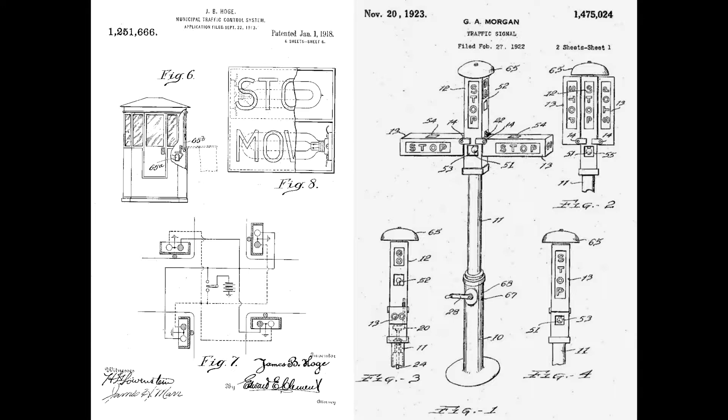So you saw variations of this electric traffic signal start to crop up all over the United States and Canada over the next decade. Among the most famous variations, many of you know about this, is Garrett Morgan's 1923 patent, and it was more reliant on semaphores and text-based directions than the electric light combination that we know and love today. However, his patent was really important because it was snatched up by General Electric. They bought it for $40,000. What that led to was increased standardization among electric traffic lights and mechanisms over the following decades.

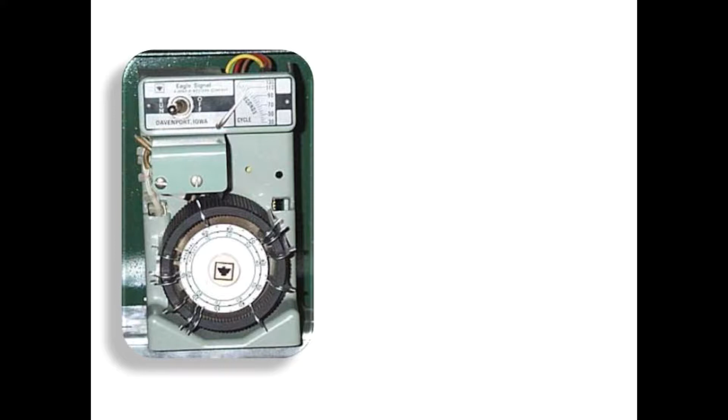So traffic signals have played this huge role in increasing intersection safety, particularly in urban areas. And while they played that role, engineers began to develop new devices to offer more nuanced control of signal timing. For safety purposes, it's unwise to waste green time on unused side streets while there's heavy demand on the main line. So the electromechanical controller looks very similar to a sprinkler system timer, Christmas light timer, those basic mechanical timers that we use in some of our household devices today.

The electromechanical controller allowed timing engineers to more easily control signal timing based on the actual traffic patterns at an intersection or along an entire arterial. By placing pins along a dial at specific intervals, signal timing could be more easily modified to better suit the general traffic pattern by time of day. Many of today's common terms, splits, dials, cycles, offsets, all come from the physical characteristics of the electromechanical controller.

Those very same characteristics were replicated in the new age of digital controllers that began in 1976 with the NEMA TS1 standard. And again, safety was a driving factor in the standardization offered by the NEMA TS1. It was basically the functionality of the electromechanical controller in a digital box, and it was designed with universality in mind, designed to spread standards across regions.

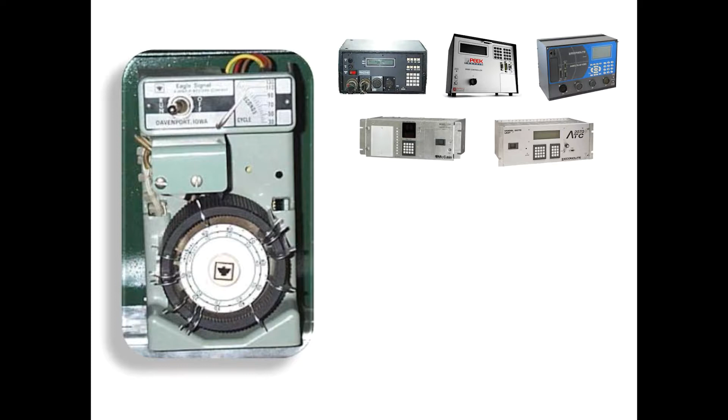This advancement was followed by the TS2, the TS2 Type 2, and the 170 and 2070 world that was pioneered by the New York State DOT and Caltrans. All of these boxes were designed for easier access, faster programming, and more granular control of options at the intersections. Those were all hallmarks of these units, and all were governed by the NEMA ring and barrier structure that was at the core of their programming.

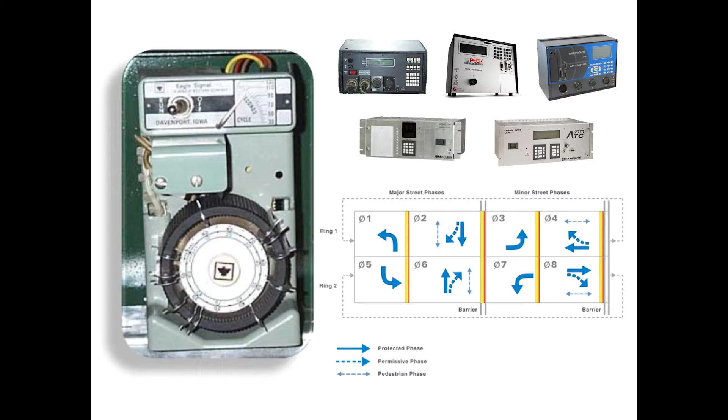So whether it was the static operation of the old electromechanical controllers or the new flexibility offered by more standardized and computerized operation, controllers improved intersection safety. It was a way to better time signals based on the actual traffic patterns observed at intersections and along arterials. So it improved safety, period. And when talented engineers applied their signal timing prowess, even the old electromechanical units could be timed to offer excellent mainline progression through a series of signalized intersections.

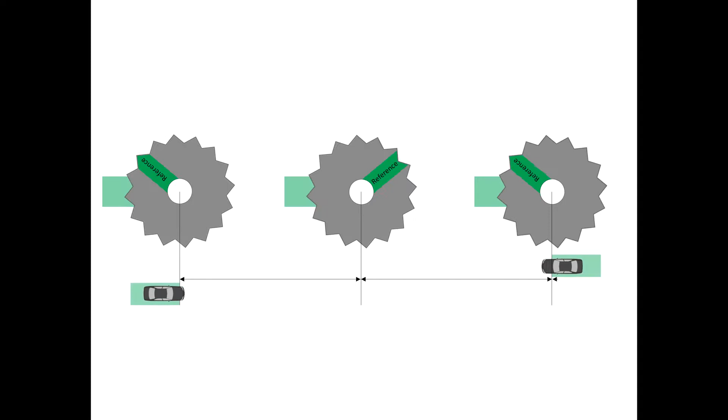So offsets were scheduled in such a way that common cycle lengths on controllers across an entire network of intersections could facilitate progression from one intersection to the next. On this diagram, you can see that the reference points match up, and our mainline directions are served in such a way that both cars, eastbound and westbound, progress through the network of 3 intersections with no stops. This analog mechanical progression forms the basis for signal timing practices even on the most modern of controllers. However, those standards are not without limitations.

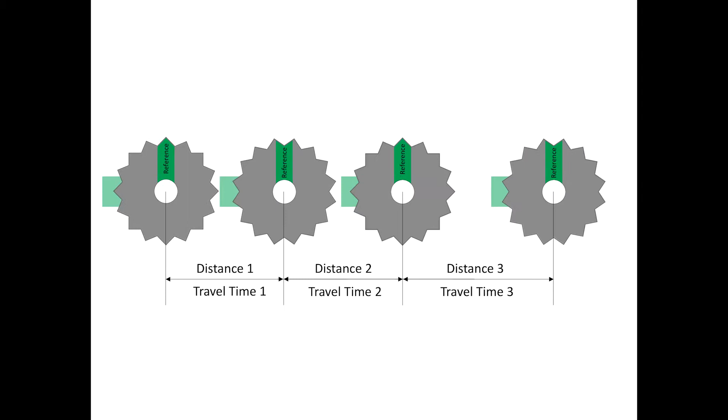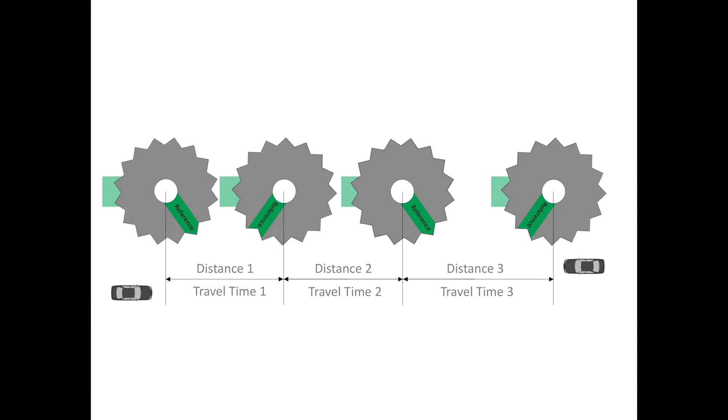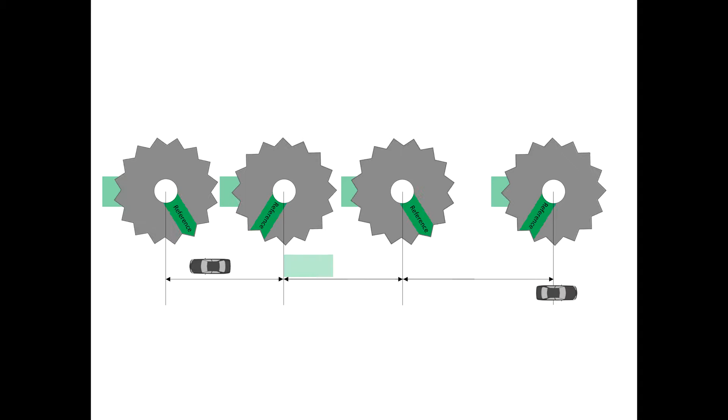So while this particular diagram worked, if we throw a 4th intersection onto the corridor, this time with a distance different than those between the first 3 intersections, bidirectional progression starts to take a hit. Our eastbound car will be able to progress through without an issue because the reference points line up really nicely for the eastbound direction. But our westbound car suffers a stop at every single intersection. That's just the limitation of the analog nature of a ring-based structure. We had to force stops along one direction in order to favor the other. So we forced stops for the westbound in order to progress towards the east.

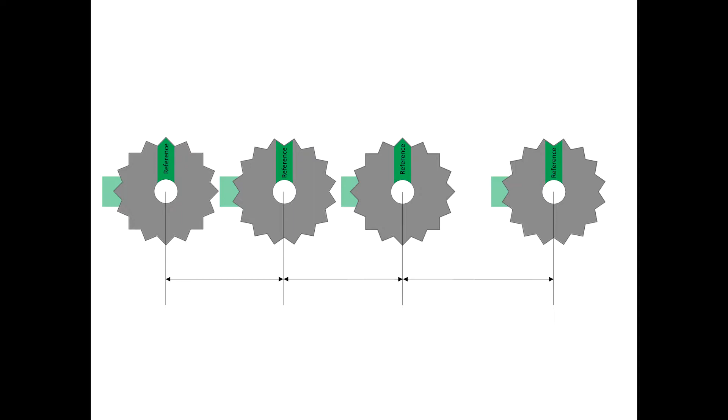And this is a sacrifice that many traffic engineers know they have to make. One direction of travel sacrificed in favor of the other. And it's a reality that our motorists deal with every day. Even the best signal timing practices can't overcome the limitations of an analog system, or even systems that emulate that analog operation. That can lead to congestion and start and stop traffic for many motorists.

A lack of coordination, of course, leads to motorist frustration. Frequent stops can actually lead to distracted driving. And even moderate improvements to signal timings have been proven to increase safety. But when we're working within the confines of an analog system, and we're forcing stops due to the limitations of that equipment and the increasingly complex math problems of bidirectional progression, we're actually inviting distracted driving and the accidents that come with start and stop traffic.

So unfortunately, the very technology that we've developed over the decades forces limitations on us that have introduced new safety hazards that really weren't even considered during the advent of electromechanical controller technology. When the first engineer designed an electromechanical signal controller, he wasn't thinking about people who were stopped at red lights playing on their smartphones. If a signal doesn't have the means to adjust to changing volumes, motorist frustration and safety hazards are just going to increase.

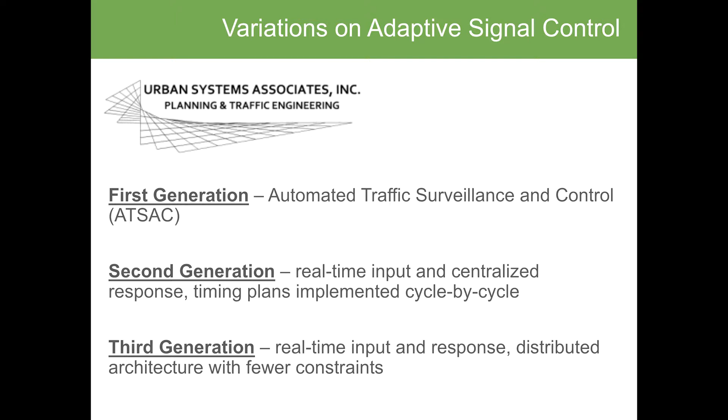We're now looking at a third generation of adaptive technology, transitioning to a distributed architecture that's going to move further away from the constraints of traditional controller technology. So we've established that traditional controller technology has its limitations. And with those limitations do come some particular safety concerns. Frustrated motorists, distracted driving, start and stop traffic. There are, of course, other benefits of automated adjustments and adaptive signal timing.

So when we base that on volume and delay, before and after studies have shown that adaptive systems can reduce overall system delay, we can achieve better progression through a network, we can reduce queuing, we can stave off the onset of congestion, and we can actually reduce fuel use and emissions. Many agencies around the country are able to apply for grant funding because all of these benefits, reduction in delay, reduction in the number of stops, improvement in progression through a corridor, also have those peripheral benefits of reducing fuel use and reducing emissions. So they can apply for grant funding that is focused on air quality.

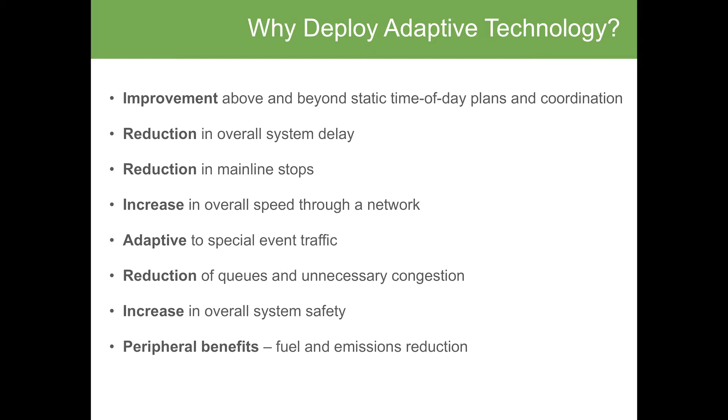But the safety benefits of a better functioning signal system cannot be overstated. Let me take you on a walk through the different generations of adaptive technology. Safety, again, was a primary driver when the ATSAC system was pioneered in Los Angeles before the 1984 Olympics.

While the system allowed engineers in their high-tech TMC the ability to remotely monitor and manage the traffic volumes and signal status of intersections throughout the city, the Los Angeles team was actually ready for a variety of different scenarios meant to not only move traffic better, but to keep motorists safe.

So prior to the '84 Olympics, one of the early simulations that they ran was a what-if scenario: what if a helicopter crashed on a major freeway? How would the engineers react? How would they change the signal timings? How would they reroute traffic and retime the signals to deal with the inevitable panic around such an event?

Not long after that system went live, there actually was a helicopter crash for real. The engineers were prepared. They were able to move traffic quickly away from the incident, and undoubtedly they kept Los Angeles motorists safe by being prepared for that.

But there was a very manual component to the ATSAC system. This allowed remote insights, a lot of data being collected, signal status, timing plans could be viewed. However, you needed a team of engineers to be able to remote into those signals and actually make changes based on the needs of the intersections or the arterials.

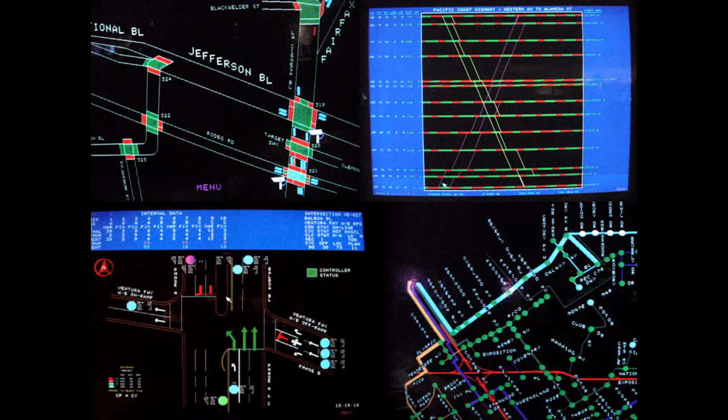So the ATSAC system gave engineers insight into signal status in ways that were previously unheard of. And with a high-tech communications network and powerful software for the time, those manning the TMC were able to make rapid changes if necessary. Like I said, this first generation system was very, very manual. It required a team to monitor and react to those issues as they arose, and while a first generation methodology was cutting edge over 30 years ago, it seems pretty archaic by today's standards.

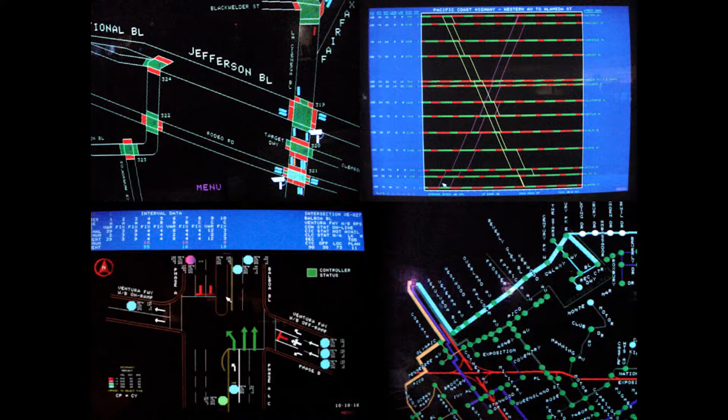Not to mention, it's an impossibility for most agencies. Cities, counties, even state DOTs are dealing with continual reductions in staffing levels. So the idea of having a team of engineers ready and waiting to respond to incoming data and reports seems like a product of a bygone era.

Interestingly enough, we're actually starting to see a resurgence of first-generation thinking with the advent of high-resolution data that provides even more incredible insights into intersection and corridor performance. Those of us here at Rhythm are absolute believers in the power of good data. However, both second and third generation adaptive technologies have been developed to automate the use of this data and subsequent adjustments to signal timing. Modern controllers, peripheral devices, or ATMS platforms are starting to give agencies incredibly detailed data sets, but they're unfortunately being advertised right now as complete solutions.

Dr. Airton Kohls from the Center of Transportation Research recently presented at an Advanced Traffic Technology Symposium in Knoxville. During his presentation, while he covered ATSPM, he made it absolutely clear that while high-resolution automated traffic signal performance measures will give engineers levels of detail that can help them fine-tune their systems and identify problems with levels of service, collecting data alone is just a half measure. You actually need to be able to do something with the data.

So second and third generation adaptive systems exist for that purpose, taking in data and actually doing something proactive with it, leading to exponentially faster adjustments that propagate safety improvements throughout impacted corridors.

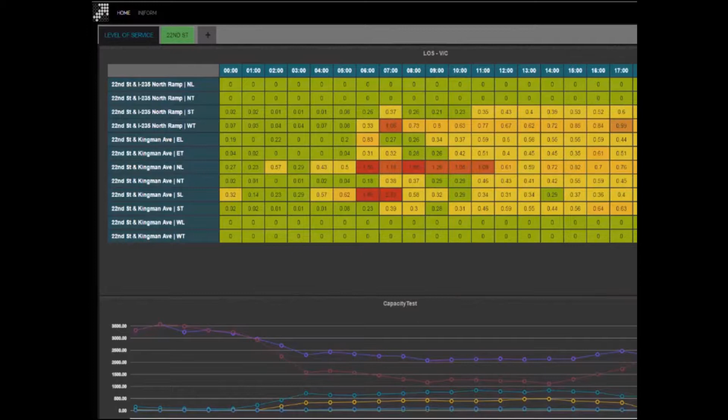So the system would collect all that data, send it back to a central server which would analyze the split failure, and it would determine that if the eastbound movements were able to take a little time from the westbound movements during the next cycle, the adjustment would be appropriate to serve that volume of traffic.

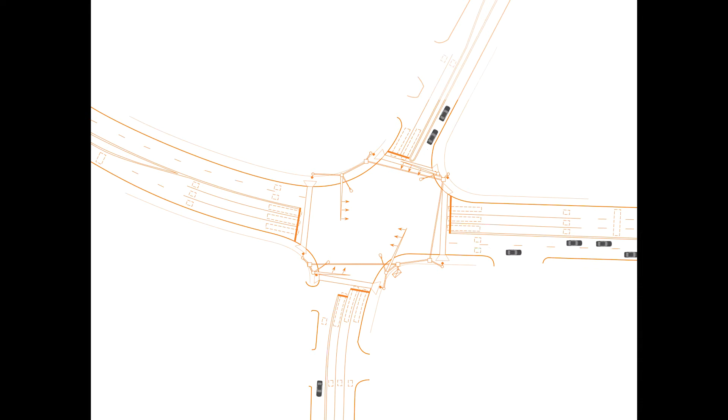To truly get the best out of a second generation adaptive system, you may need to deploy really extensive detection. At the very least, you need stop bar and advanced detection so as to better estimate queues. And that extensive detection may be not only stop bar and advanced, but upstream detectors or downstream to be able to pass information in a peer-to-peer way to the next intersection. Even with all that detection deployed, you can see on our map the limitations of single point detectors.

So each detector in a second generation system feeds the system with ones and zeros. It's basically just presence data. But take a look at the north side of this intersection. You can see that we've got cars coming out of the mid-block, but they're not triggering the advanced detection. They're too far downstream to trigger the upstream detection.

Missing that advanced detection, the first time this intersection would ever see that new volume influx would be at the stop bar. So by the time the intersection had called into the central server, relayed its data, and requested analysis and adjustment, it's too late. The pattern's changed again, and the affected movement may not have the same volume or priority that it did in the previous cycle.

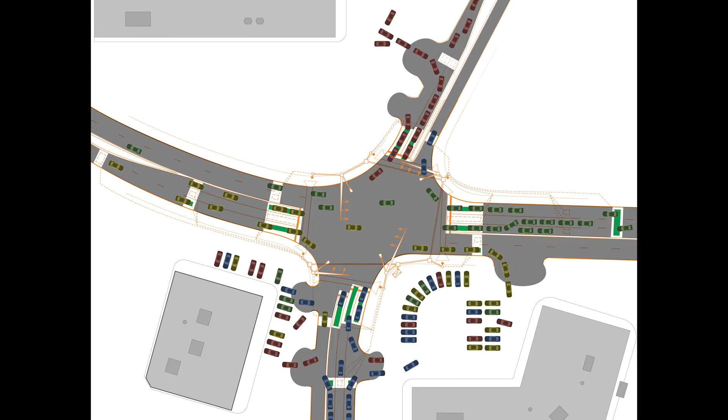So second generation systems still use controllers as the basis for all timings. You'll recall the limitations of the electromechanical and the analog controllers. That means that they still suffer from the same analog limitations even in second generation adaptive systems. So despite the improvements in analytics, improvements in adaptive algorithms, and adjustments to varying traffic patterns, these systems actually managed to hurt the adaptive name more than help when they struggled to gain traction in the early 2000s.

So what's the difference with a so-called third generation system? Well, for one, they do away with the need for extensive single point detection. A third generation system feeds a separate computer processor at the intersection, not the controller, a separate processor. It feeds it with estimated queue data so as to better analyze the totality of each approach and phase, not just single points of data that may or may not be triggered.

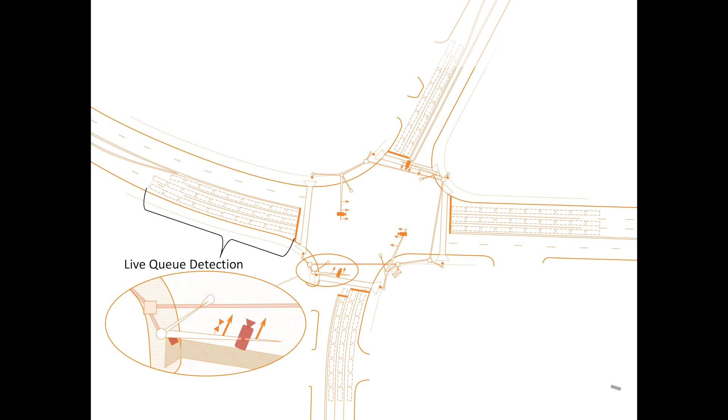So as we introduce some cars onto the scene, we can see that live queue detection picks up their presence all throughout the approach, not just at single detector points. That's going to allow the system to better analyze queues as well as the delays on stopped movements, all of which can be factored into the algorithm. That queue analysis greatly reduces the amount of gray area at each intersection, which gives third generation systems the ability to respond much more appropriately to actual intersection demand.

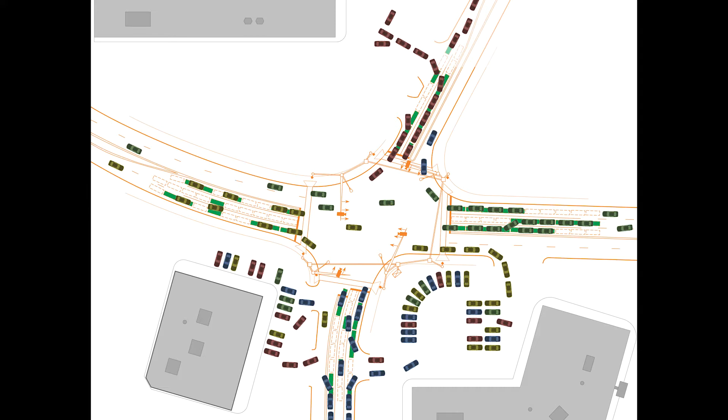Furthermore, the changes that take place are happening at a local level. The distributed architecture doesn't need to call back to a central server for instructions, but it can make the changes to the intersection on the fly. Mid-cycle, even mid-sequence adjustments based on variations in volume, real-time traffic demand.

So those second generation systems, and I don't want to overlook the benefits of a second generation adaptive system. They are tremendous improvements over the manual operations of first generation systems. They're able to make these nuanced changes based on collected data and then instructions that are sent back to the intersection. Timing plans are adjusted, but pre-planned sequencing largely remains the same.

The only things in a third generation system that are pre-planned are really the global constraints, your mainline movements that facilitate progression through the corridor. So outside of those pre-planned movements, which can begin early, they can extend, they can truncate according to real-time volumes, each cycle's phasing and sequencing may be totally different based on the actual present demand at the intersection. So this has finally started to break with a long-established NEMA ring-based structure that locks in sequences for extended periods of the day.

That NEMA ring-based structure is limited in its ability to adjust, even with the most powerful adaptive algorithms. So moving from a second-generation mentality to a third-generation mentality, that really allows us to break out of that structure and serve traffic better based on real-time priority.

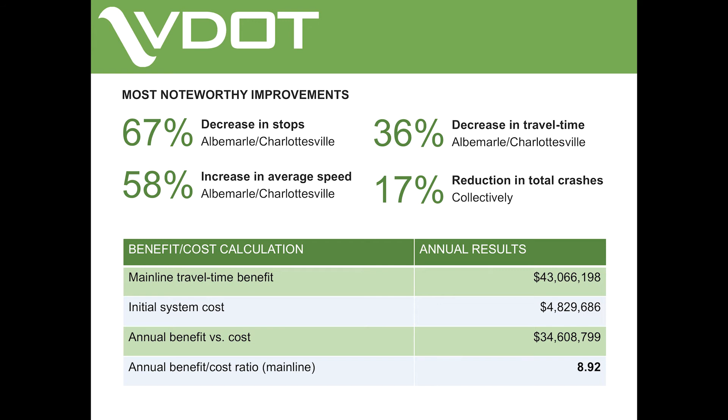And that's a goal for all of us, increasing the amount of attention motorists pay to the driving task. So when phase orders can't necessarily be predicted, as they can on so many morning and evening commutes, motorists actually develop a tendency to put down their phones, to pay attention to their surroundings, even when stopped at a red in heavy traffic.

The InSync system, which is a true third-generation distributed architecture, real-time adaptive system, has had other safety numbers reported from deployments throughout the Midwest and South. And while these numbers don't have the long-term backing and quantitative analysis performed by VDOT, they do corroborate how better traffic flows and priority based on intersection service can actually decrease accidents.

So these are based on police reports from before and after installations, where the city of Topeka saw accidents fall by up to 27% on adaptive corridors. Lee's Summit in Missouri saw a 17% reduction in crashes, and they actually ended their red light camera program because the drastically improved mainline progression nearly eliminated red light running altogether.

Springdale, Arkansas reported a 30% decrease in accidents on their central adaptive corridor, and Evans, Georgia experienced decreases in accidents up to 26%. In addition to the various third-generation benefits that take efficiency to the next level, InSync is the only adaptive system with these kind of thoroughly researched and agency-backed safety numbers.

So that same third-generation algorithm has been optimized and takes into consideration other road users as well: pedestrians, cyclists, even public transportation. The best example I have is in Kansas City, where the InSync system was installed on a 2.2-mile, 21 intersection route where the city's streetcar operates. The streetcar began running about a year ago. This is in an urban downtown core.